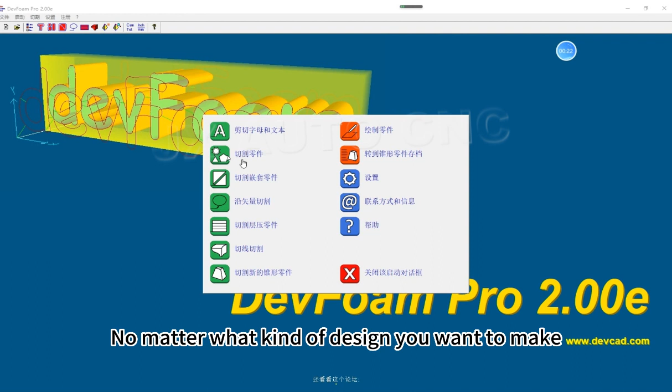Now we are going to introduce the second function in the machine software. This is what we saw last time, for cutting shapes. This is the most used function. No matter what kind of design you want to make, you can choose this one to make it.

Before we introduce it, we first open the software. This software is to draw a picture. You draw a design, you can draw a circle, any size you like, and save it on your PC.

You can choose the DWG format, or you can choose the DXF format. Save it. Then we open this one, open the design file we made.

This one means the heating wire seam gap. And XY offset means the circle, the design circle, this edge between this one, its distance, the offset. And the cutting forward is here to the side. This one I can ignore.

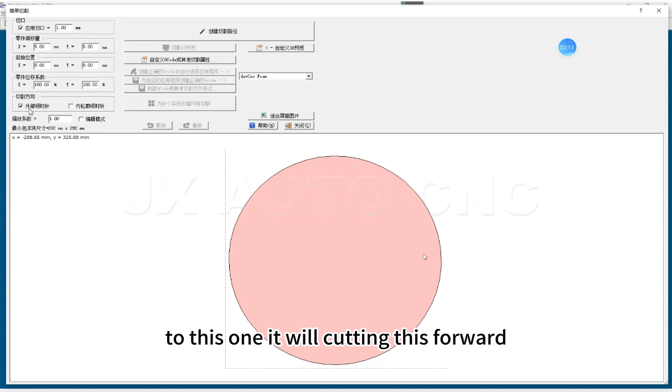And this is cutting forward, it's clockwise forward. If you choose this one, it will cut this forward, clockwise. Usually it is cut clockwise.

And this is for review of the design file. If you input value 1, it is the same as the design file. One by one, it is the ratio times.

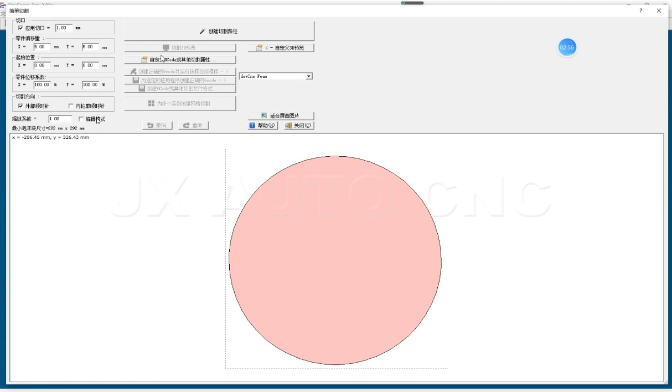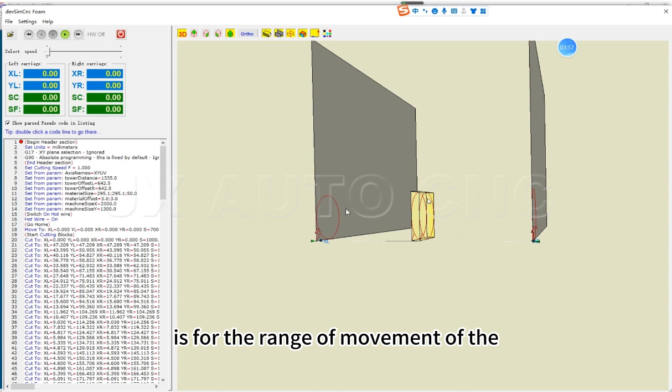And this is the editor mode. You can choose the preview. The two gray bold lines show the range of movement of the groove which you want to cut. This is just for preview.

Here you can select speed, and the green one is for start. Here is select speed, and this one is for stop. After you finish, this is a 3D preview.

We just see it. After you see the preview, if you think it's okay, you can choose this one to save the design file. It's saved as a G-code design file.

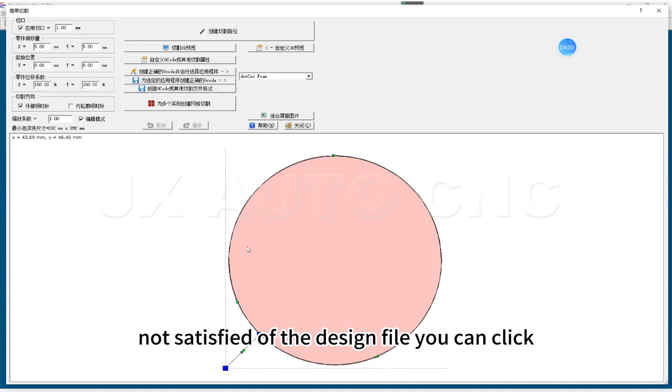If you find the design file not satisfied, you can click this one to change the design file. You can change any place for the knife start.

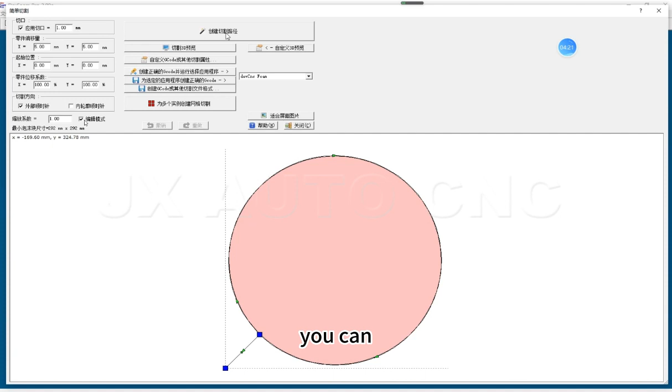After you change it, you can cancel this edit mode. Then we choose this one to save it.

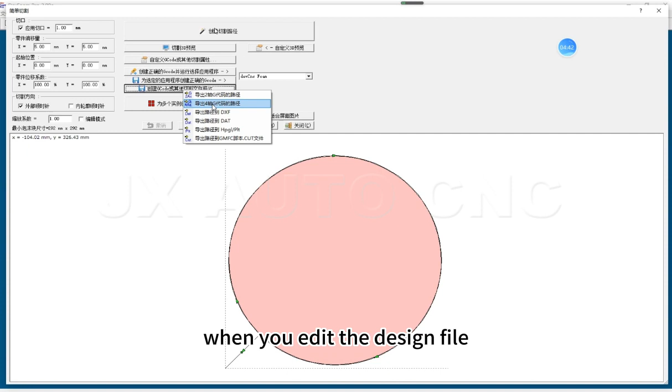Please do not choose this one when you edit the design file. Only save is okay. Save it in 4 axes, because the machine supports it.